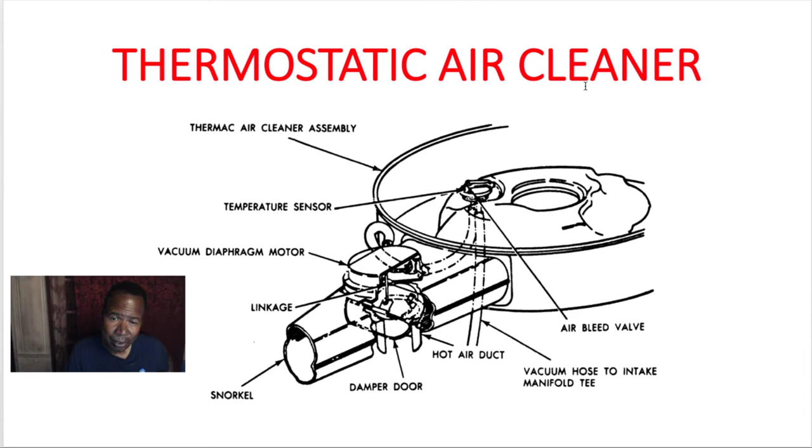We have a thermostatic air cleaner, a heat door, and a sensing bulb. Let me see what position it's in. Right now it's in a fully hot position.

I'm sorry, it's in a fully cold position. Heat is off, the door's open to cold air. That's a warm engine. This right here is the heated position. You see the heat going up?

Right here, there's a little aluminum tube that goes from the manifold. When the car is heating up, that air comes up through this tube and into the intake and into the air cleaner to help heat up the air fuel mixture and reduce HC and CO.

So this is a cold car, this is a warm car. Cold air is going through into the air cleaner. On a cold car, this door is in the hot air position, and heated exhaust air is coming up this aluminum tube through the air cleaner to help heat up the air fuel mixture.

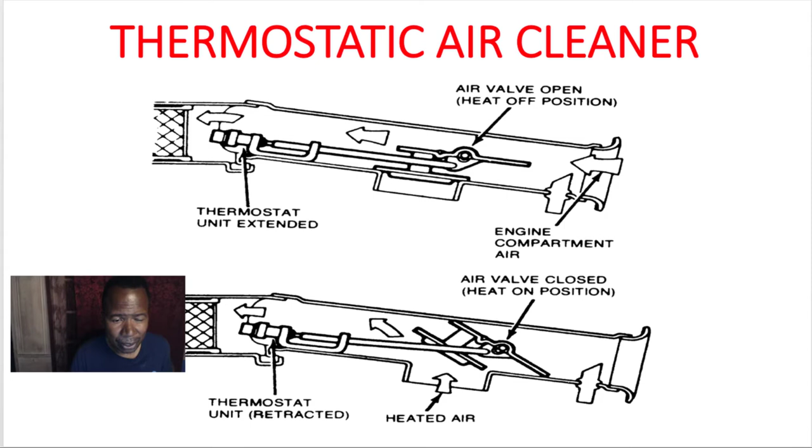And it's done by this vacuum door here. This vacuum door receives vacuum from the sensing element. So when the car is cold, you can see the vacuum overcomes the spring, pulls the door open, and heated air goes into the carburetor or throttle body.

But when the car is warmed up, this vacuum source bleeds off the vacuum, the spring pushes the door closed, and now cold air goes by because we don't need heated air on a warm car. Otherwise you have a drivability problem or maybe high NOx.

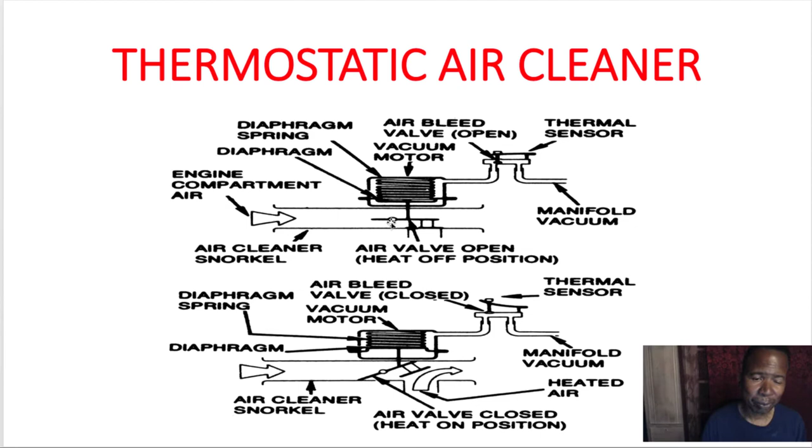And here's the whole setup. Thermostatic air cleaner. You can make it out: air induction, the housing, filter, the lid, the sensing element.

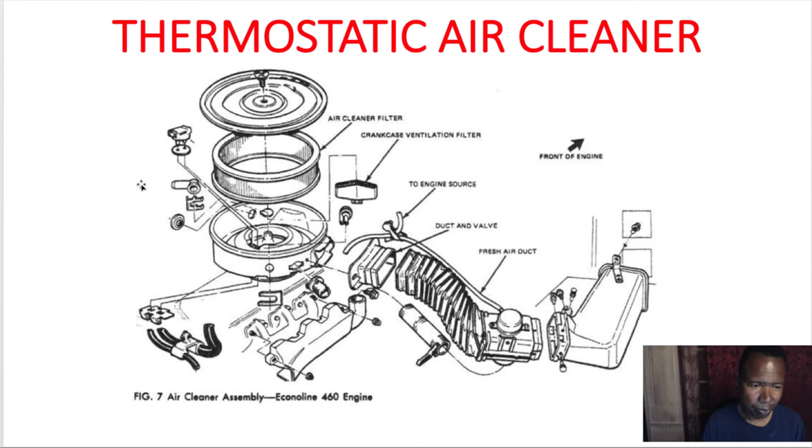I don't see the tube. Oh, here's the tube right here. This is a flex connection that goes to the manifold. This is what the hot air goes through, and it goes through this air cleaner tube into the air cleaner.

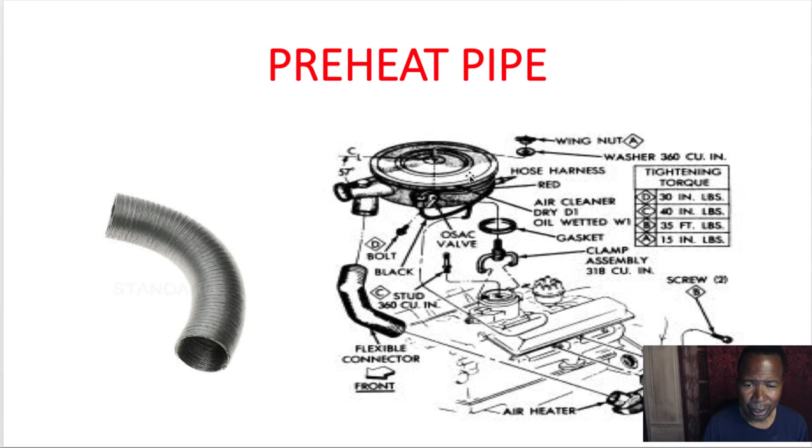Imagine you have a V6 or V8. This valve is going to cut off one of those pipes, so the exhaust has to flow back over the intake to the other side. So an EFE valve also helps reduce HC and CO on a cold car by heating up the intake manifold.

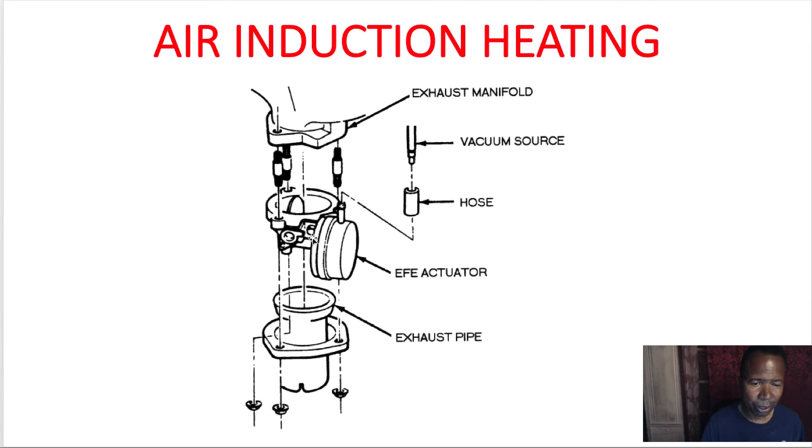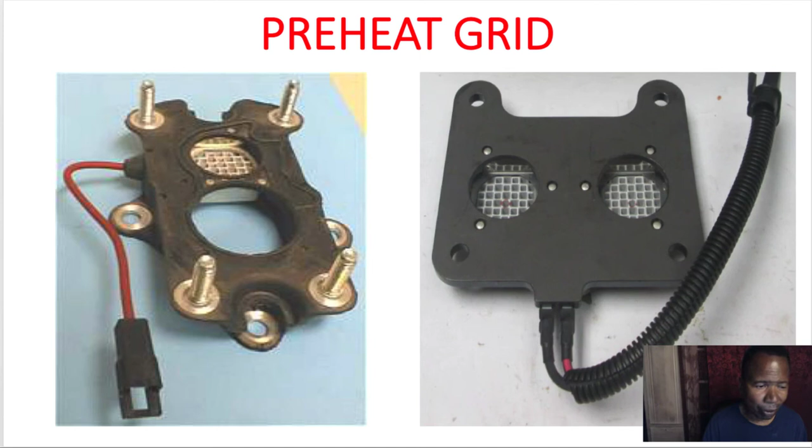We also have a heat grid that does the same job, but sits either under the carburetor or throttle body. And here's another one, the early fuel evaporative system. See this door? Vacuum is here on the cold car, and it pulls the door closed.

So on a V6 engine, I have the V6 again. This side is closed because of this valve, this door closes. So the hot exhaust can't go out that side of the pipe, at least most of it can't, so it can go back up through the intake out the other side.

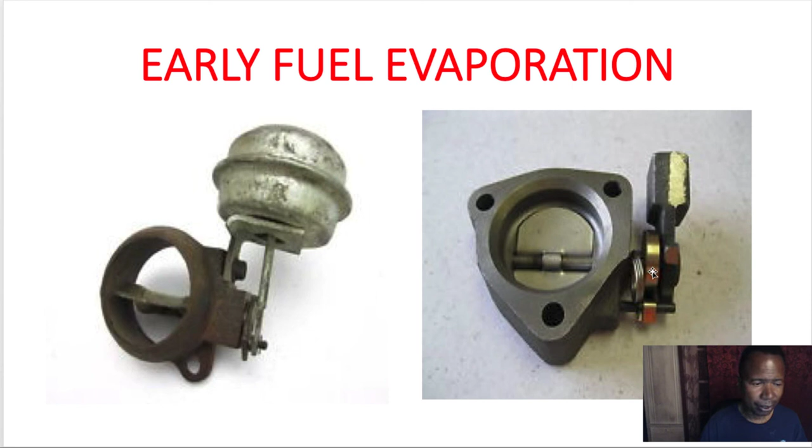As that heat is going through the intake, it's heating up the air fuel mixture and heating the intake. But when the car warms up, this door is in a fully open position. It's like a vacuum control, and this is a spring controlled one here. You see a better picture of it here - that's the butterfly.

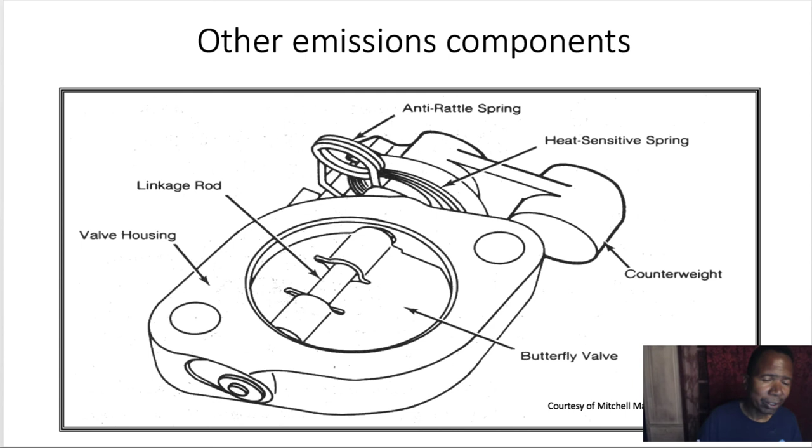Alright, that was the EFE system, early fuel evap, and its job is to help control HC and CO on a cold car. I'm out.